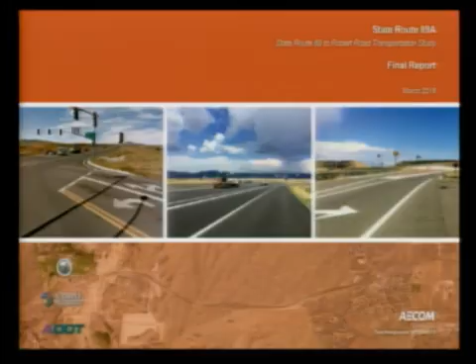Item 3, discussion of IGA with Yavapai County for Glassford Hill Road and Viewpoint Drive lane widenings. Good evening, Mayor and Council. The item before you is approval for intergovernmental agreements, or IGAs, for turn lane project partnership with Yavapai County. These are two turn lane projects on Highway SR 89A.

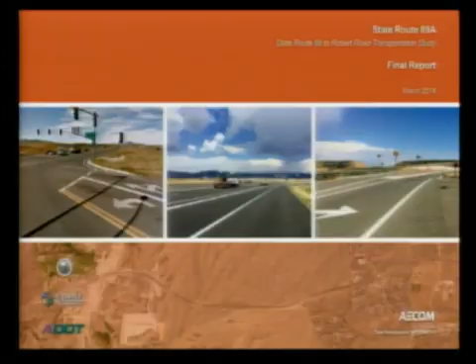Just to bring Council up to date, you see the overhead here. Every 5 years we do a regional transportation study through the Central Yavapai Metropolitan Planning Organization, or CYMPO. We're currently in another cycle of a 5-year plan. Five years ago, there were recommendations made out of that transportation plan for growth planning, in addition to revenues and the like. So out of this public study, which was actually finalized last March, it went on for about a year, finalized last March of 2018.

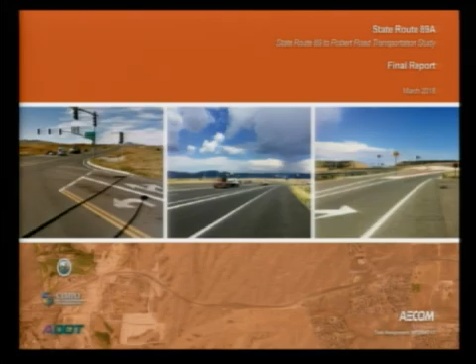All these studies, we take public input, have a couple public meetings, take input throughout, takes about a year, and we look at how we are going to be guided with our transportation network regionally for the next 5 years. This study was done, as I mentioned, last March, and there were some recommendations from the public input, plus the technical data, I always like to point out, that was done with the transportation professional, that there were actually some recommendations here of projects that would be the best use of available dollars. As you can see, the two highlighted projects are the ones I'm going to talk about tonight.

It's actually priority number 4 and priority number 6, some additional turn lanes. So not very huge projects, but actually very viable, and if they're implemented, it will greatly help some of the mobility we have on these corridors.

Going into exactly what these turn lanes are, the recommendation for Viewpoint Drive came out of the study - in the commuter hour in the afternoon, traffic backs up on 89A on the main line of the highway for traffic on the ramp, because there's only one lane to get into the subdivisions of Pronghorn and Viewpoint, and in the county unincorporated area out towards Antelope Meadows.

So this is a very good project, and as you can see, what's noted in red there is actually the scope of the project - about $120,000 worth of construction cost, and there's a design to be done too that's actually already been done.

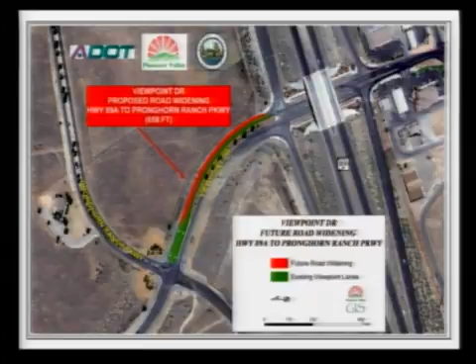We talked about partnerships. As you can see, we actually have 3 partners. This particular intergovernmental agreement is between Yavapai County and the Town of Prescott Valley, because ADOT has some challenges with money off their system if they don't benefit. But I do want to point out that ADOT is a partner because we're going to do our part for the lane widening, but for the extra capacity, ADOT's going to redo the striping. So they are part of the partnership - they'll do their project concurrently, separately.

If I'm explaining it well enough, there's actually capacity underneath the bridge you can see in the exhibit there that's blocked out. Years ago, when they put that interchange in, about 15 years ago, they actually planned for this capacity. You won't have to change the bridge - they stripe out that extra area. So all they really have to do is black out the white lines, and you've got that additional capacity of a lane with just changing the stripes. That's why ADOT's a partner - concurrent with us, but not part of the intergovernmental agreement. That's the Viewpoint second lane that you see in this exhibit.

The next exhibit is for Glassford Hill Road, called the Glassford Hill Road Free Flow Right Turn Lane. This project takes off from the ramp on 89A, which is ADOT's right-of-way on the Glassford Hill ramp going eastbound.

What we're actually adding is, you have capacity on the ramp, but we're going to add a third lane on Glassford Hill Road up to Tuscany, south, across the street from Granville Parkway. As you can see, there's already a turn lane there, detailed in the baby blue.

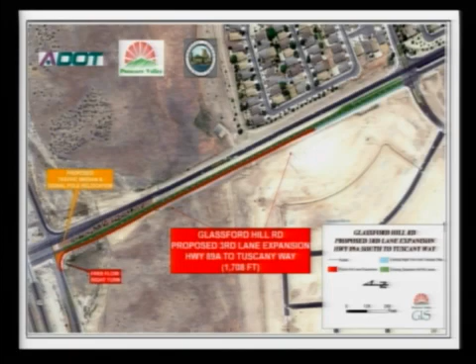So what we'll do is similar to what we had at Long Look years ago. That will be a free flow right turn, so you won't have to stop—we hope they slow down to make the curve—and that'll add extra mobility because you don't have to stop like you do now.

So we're seeing these growth patterns. We'll get that third lane, and traffic continuing southbound on Glassford Hill Road would have about 1,700 feet to merge into the main lanes. You'll see much more traffic capacity on Tuscany, with growth in Granville and Santa Fe.

This is one of those growth things that came out of the transportation study, and technically it makes sense—we're seeing more cars and we'll get a lot more mobility. So this is one of those well-timed projects for the expenditure, and the cost is in the neighborhood of about $500,000.

So that's the two projects. What you have in front of you tonight is the funding mechanism we need to put in place. The county has already passed this through the Board of Supervisors and discussed it. So what we need is for both governing bodies to approve this intergovernmental agreement so it puts the funding in place, allowing us to do the design and construction.

If all goes well, upon your approval, we anticipate starting the design right away, and we're looking at the fall to get these projects going. They're needed now, and once the funding is in place, it's time to move fast and get the construction underway. We're looking forward to bringing this back to you on July 11th to get this signed so we can get the funding in place and get going on construction.

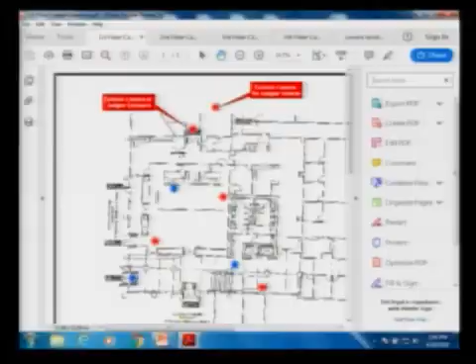I'm just going to kind of give you an idea of what we're doing with the cameras. For the most part, we're replacing existing cameras, so when we have a camera, we are recabling that location to get the infrastructure in place to put the new cameras in, and we're just going to replace the existing camera with these new cameras. However, there are a few areas where we are adding cameras.

What you see in front of you right now is the first floor, and this is a specific area where we're adding some new cameras that were specifically requested by the Supreme Court of Arizona for the judge. We currently have a camera in the Sally Port right now, but we're going to be moving that camera outside of the Sally Port so that it shows basically the area where the judge parks his vehicle.

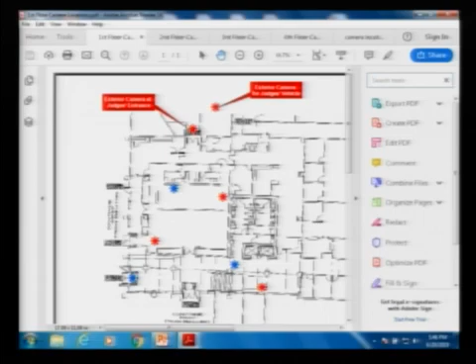We're also going to have a camera outside of the holding cell area. There's currently one in the holding cell, but it's going to be outside of that area, kind of showing the area between the library and the Civic Center. And then we're going to be adding an additional camera in the courtroom to the camera already in there, so we'll have both a view of the audience and the chairs and a view of the judge as well, to get a whole picture of what's going on in that room.

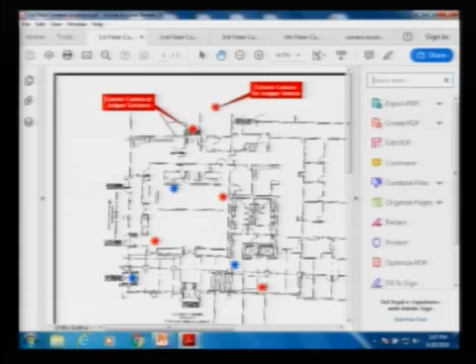Then we're going to be replacing the cameras in the hallway. We're adding a camera that basically shows what's going on at the court window, and another camera at the door above. If you walk in before you go into the courtroom and look up to your left, there's a camera up there that we've never actually used. We're going to be adding a camera there as well to get all the traffic right in front of the courtroom. So that's mostly what's going on with the first floor.

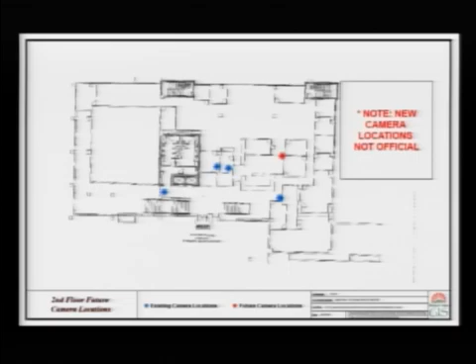As far as the second floor goes, we're going to be mostly replacing existing cameras. There's 2 in customer accounts, as well as the 2 in the hallway. I'm trying to think of what that red dot is there—that looks like it's inside. I think mostly we're replacing stuff on the second floor. I don't think we're adding anything, but I'll try to get you more information in case we are.

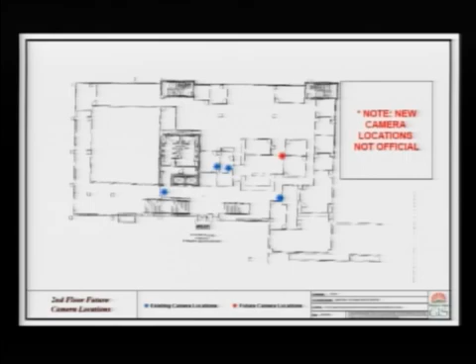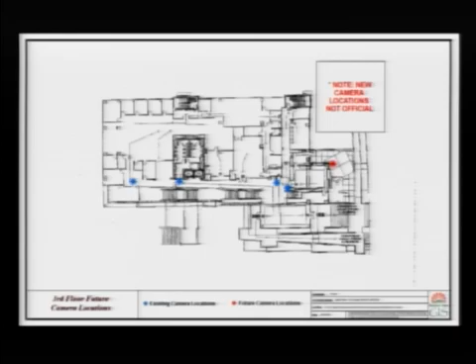On the third floor, we're mostly replacing existing as well—that's the blue dots there. So basically it's in the hallway area. But then the additional camera is going to be added outside of the doors as you come up the stairs onto the third floor landing, so we can get that outside view. One thing we've discussed in the past is having cameras more on the outside to get those areas as you come into the building, in case there's some activity we don't want happening.

We can't run cable to that area, so within the budgeted money and the funds you approved, I was able to add 4 additional wireless cameras, which is great because we're going to be able to hit the different corners of the building—I'll show you in a different slide. We hopefully can put one online for people to see what's going on, and maybe point that at the amphitheater or something like that. So we've been able to get some wireless cameras within that budget and stay within it. I'm real happy about that.

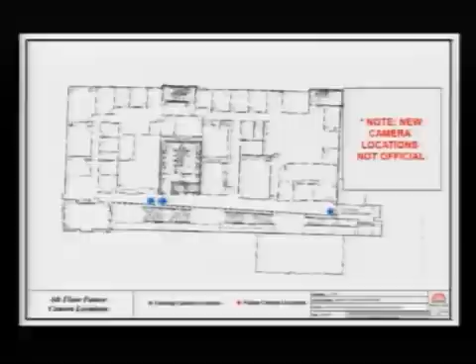On the fourth floor, this is basically just replacing existing cameras, pretty much in the hallway there, so that we can get all those different entrances.

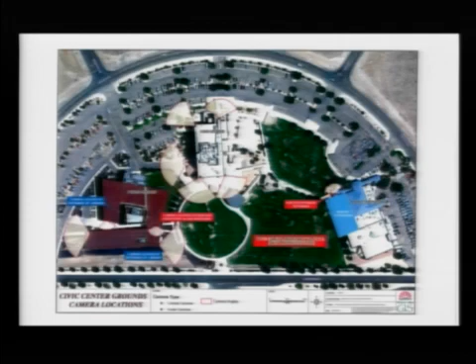Just to give you a status, I have all the cameras in hand. We have to do the cabling in order to put those cameras in, so the cabling is where we're at right now. The library has been completed cabling-wise, so we're ready to go there. Town Hall, we have just a couple more cables to do on the first floor, and then we'll be done, and police will be done next week. So we're going to have this all done before the end of the fiscal year. All that cabling will be done, and then I'll be working with Josh in facilities to get those cameras mounted in all the different areas. We'll have everything done that we need to pay for by the end of the fiscal year, and we'll have a great system to use going forward.

I have also purchased, as part of that, and the police have purchased, some new TV monitors for over at the police department.

I've purchased very small mini computers to attach to those TVs so that we can get whatever views they need to be able to see in their report writing area and their records area, to keep an eye on what's going on with the cameras.

So I would welcome any questions that you might have at this time.

Thank you, Mayor. I just had one question. I do notice when we go in the elevators, the place for cameras up there, there are wires. Did you say we're putting cameras inside the elevators? Yeah, those are just fake cameras. Within the elevator, those are fake cameras.

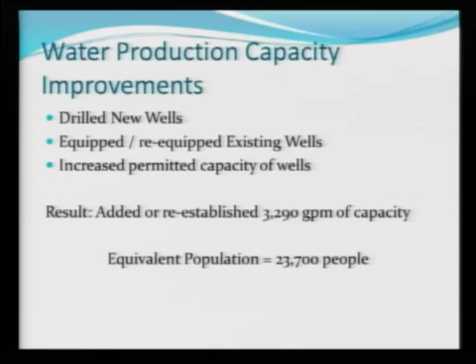Are you ready? Ready. All right. So with the new wells, you're very familiar with the Little Pete well and the Antelope Park well.

The Little Pete well should be called the Big Pete because it gives us 2,000 gallons a minute, one of our top producers. The Antelope Park well will give us 500 gallons per minute, so a total of 2,500 gallons per minute added, which will serve roughly 18,000 people equivalent population.

The 50% service factor essentially means that if you're looking at a 1-year period, the average day typically occurs maybe in February or March. But in the middle of summer people require almost double the capacity, so these numbers are based on a peak summertime number. We could serve that population, and if it was the middle of winter you could double that population, but we're looking at our worst case scenario.

Just real quick, so you're aware, the Little Pete well is not online yet. I'll have some pictures at the end to show you. It's under construction, but probably in about a month we will be in a position of having that one online.

The Antelope well, that project has been a little bit more problematic. It was more difficult drilling, and there were problems encountered. So the driller has just now pulled off of that site, and the contractor that's going to be equipping and doing the above-ground piping is just now mobilizing to that site. It's going to take another 2 months before that well is close to being ready.

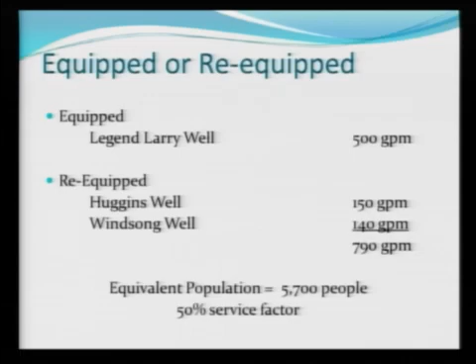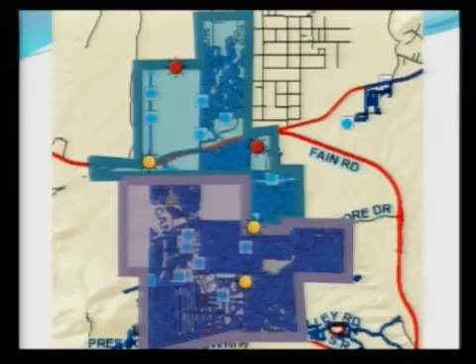The purple area is essentially the area served by our central well field, which the 4 biggest wells we have are over near Granville and primarily serve this area. We can transfer water back and forth, but with the addition of the 2 new wells and the equipping of the Legend Larry well, most of the capacity we've added, you can see, is in that upper area. I wanted to point that out now, so I'll mention that one more time at the end.

All right, so now the administrative changes. We had a number of wells that, had we pumped them 24 hours a day, 365 days a year, we would have exceeded the amount the Department of Water Resources said we could pull out of the ground. So with the Out N Out and the Middle Robin well, the first 2 I've listed there, we had the ability to pump out 75% of the capacity. In other words, we could pump it, and if we did that 24 hours a day we'd have to stop in September and take them offline until the next year.

Okay, so obviously that doesn't help us when we need operational flexibility. If we've been pumping those wells for 6 or 8 months and we decide we're going to take them offline, and then we have another well fail somewhere else and we need that capacity, it's like, oh, are we stuck now?

So we went and had our hydrogeologist put some reports together and do some calculations, and we submitted applications back to the Department of Water Resources to increase those capacities, because they want to make sure that you can provide that water and you're not impacting other wells in the area that people have drilled. So they look at that very closely.

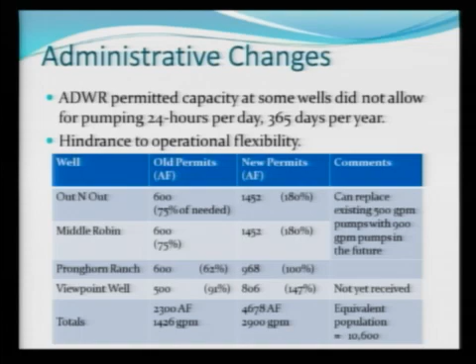So for the Out N Out and the Middle Robin well, we were actually able to significantly increase the paper capacity of those wells from 600 acre feet per year to a little over 1,400 acre feet per year.

So number one, we'll be able to pump those wells 100% of the time if we need to, but we also got additional capacity so that for those 2, with the 500 gallon a minute pumps that are in there, we can actually take those pumps out and put 900 gallon a minute pumps in there to get an increase in physical capacity as well. So those will be future projects that we'll be doing.

Pronghorn Ranch and Viewpoint, we also got those bumped up either to the 100% level or just above that. And so that gives us a paper capacity of an additional 10,000 or 11,000 people we could serve with that. Again, that's going to give us the operational flexibility and redundancy.

So in summary, we've increased our physical production capacity by about 30% overall, which amounts to about 12,000 gallons per minute that we could pump out of our upper system, which is the main area. That's equivalent to about 18 million gallons per day, which is about double what we need in peak summer day, which is about 9 million gallons per day.

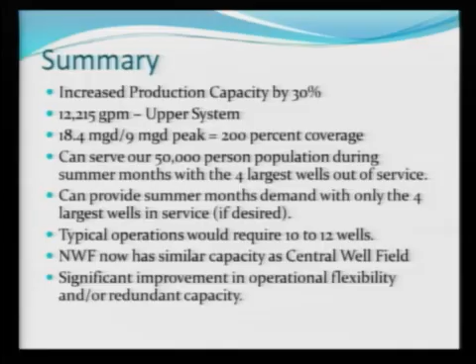What I talked about with the North Wellfield having the additional capacity, so with that additional capacity, we have the ability in the North Wellfield to pump an equivalent volume of what we could already do in the Central Wellfield. So with the upper area, we could completely shut off the Central Wellfield and all the wells in the purple area, and in the middle of summer, we could serve everything from just the northern area. Or we could shut off the northern area and just serve everything from the Central Wellfield. So it really gives us the ability to move water around and not just be pumping from one specific area all the time, which does help our aquifer.

And just some pictures that were actually taken today. This is the Legend Larry well, and this is the inside. This is the Little Pete well. You can see this is a much bigger motor, and this is what we call a line shaft, so the motor is above ground. With the one you just saw, there was no motor in the picture because it's 600 feet below ground. So this is the Little Pete, obviously bigger because it's a much bigger, it's a 2,000 gallon per minute pump. And that's it.

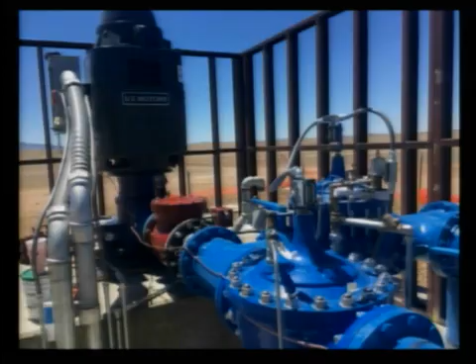That's really comforting when you get right down to it. I hope that our citizens pay attention when this information is provided and feel comfortable, because as we all know, people are very concerned about water because we have people all over Yavapai County giving out disinformation. So this is straight from the expert, and I hope people will pay attention to it and back off and not be so anxious. Thank you, Neil.

I just wanted to say thank you, Neil. It was a very good presentation and quite amazing on what we have available here in our town. Excellent job. Thank you. Nothing else? Great job, Neil.

And we're not running out of water. We've got a lot of water beneath our feet, so this is, preaching to the choir there. Thank you, sir. With that being said, we're adjourned.